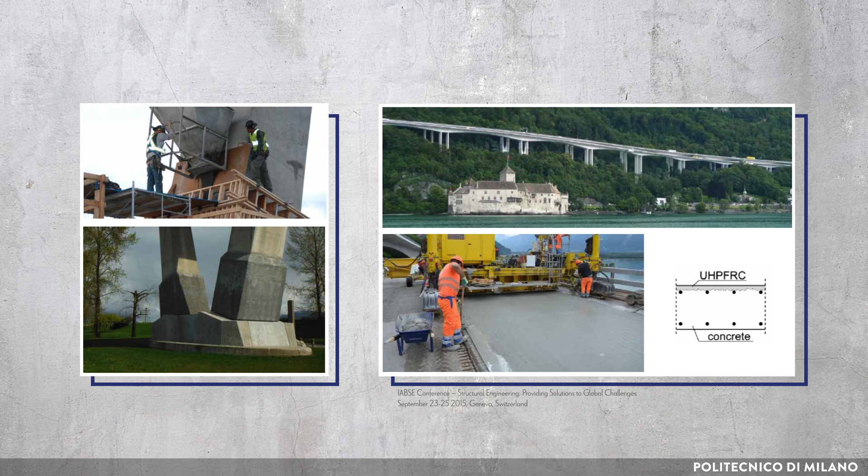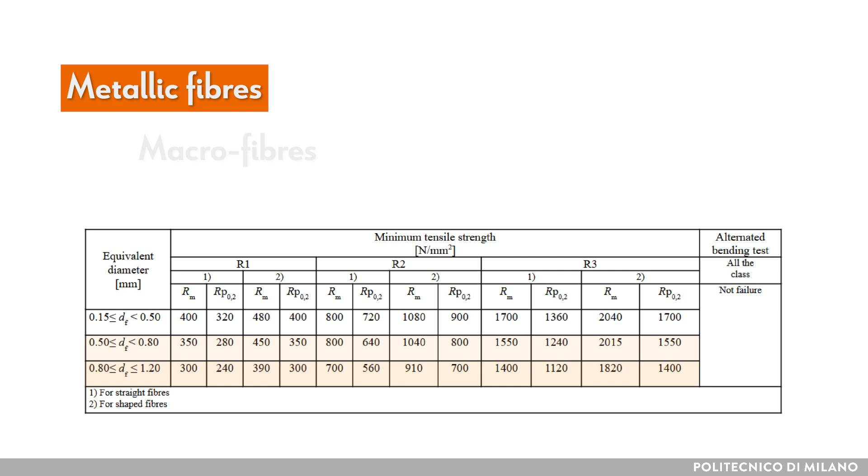In the market, many types of fiber are available. It is possible to split the fiber world in two large categories, the metallic and the synthetic fibers. The former are the most used until now to guarantee high performance of fiber-reinforced concrete and can be split into three classes according to the equivalent diameter of their cross-section. Macrofibers, with a diameter in the range of 0.8 to 1.2 mm, mesofibers in the range of 0.5–0.8 mm, and microfibers in the range of 0.15–0.5 mm. It is worth to note that synthetic fibers can reach a minimum diameter in the order of 10 microns.

The strengths characterizing the three steel classes are aligned to the values of conventional rebars, Dywidag bars, and steel used for pre- or post-tensioning. Looking to the most used steel fibers, the structural effectiveness is guaranteed only if fibers are well dispersed in the volume. If fibers are concentrated, no local toughness is achieved.

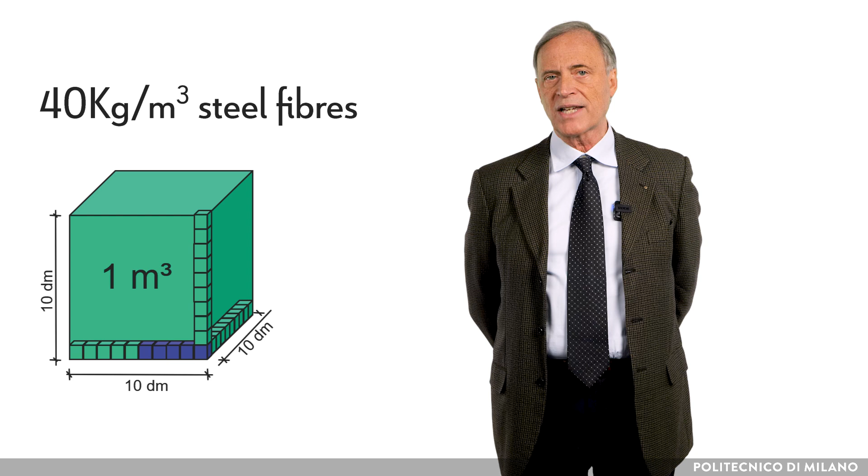Obviously, for example, an amount of 40 kilograms of fiber in a cubic meter of concrete corresponds to a growing number of fibers depending on fiber sizes. We can count around 160,000 fibers up to a total number of around 20 millions, passing from macrofibers 60 mm long with a diameter of 0.8 mm to microfibers 13 mm long with a diameter of only 0.16 mm.

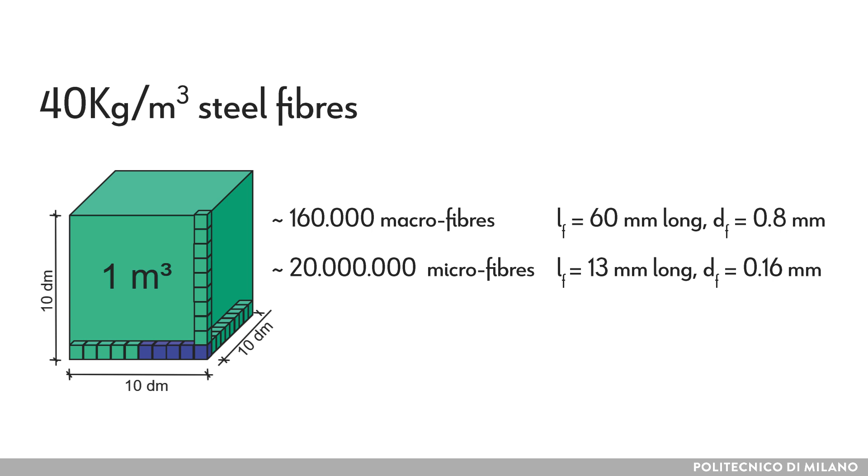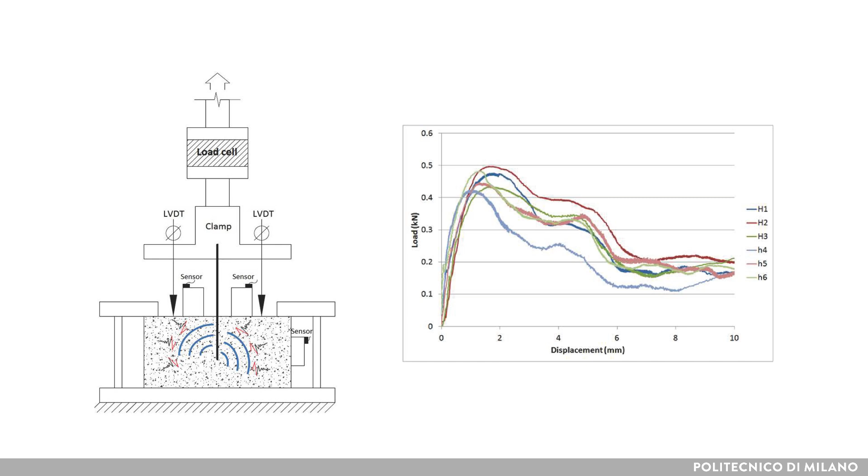The residual strength after cracking is due to the bond between the fiber and the matrix in the pull-out action. Even if we adopt a straight fiber embedded in the same concrete mix, the residual strength shows a certain scatter due to the distribution of aggregates around the fiber. The high standard deviation in the response is one of the peculiarities that has made difficult the evaluation of the fiber residual strength in the post-cracking.

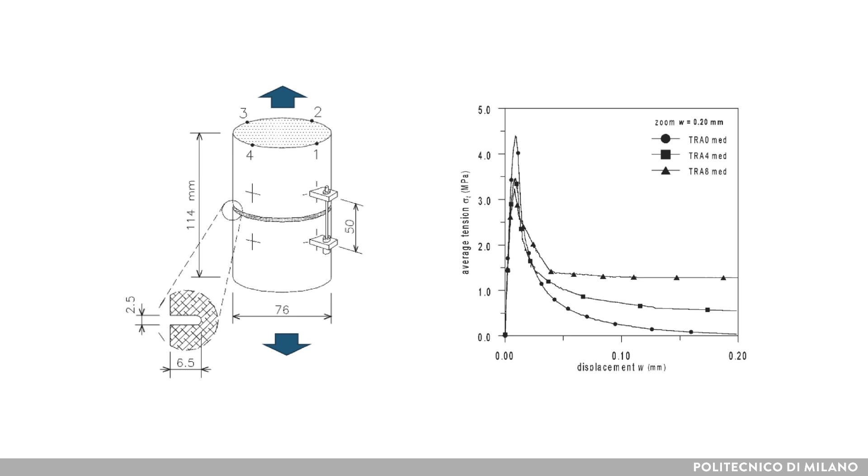In a uniaxial tension test carried out on a notched cylindrical specimen, fiber pull-out contribution corresponds to the curve after the crack opening. Only the accumulation of fiber pull-out resistant mechanisms can give a significant contribution to the overall response after cracking. Fiber-reinforced concrete performance in bending is measured by means of a 550 × 150 × 150 mm notched prismatic specimen to reproduce a three-point bending test.

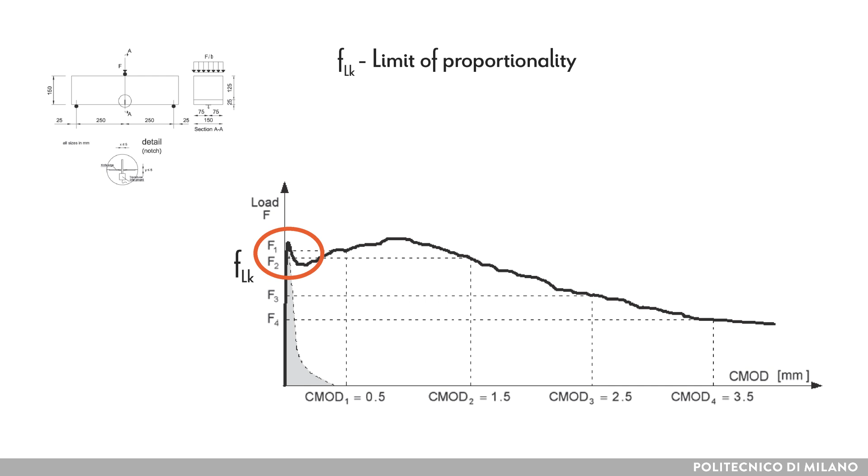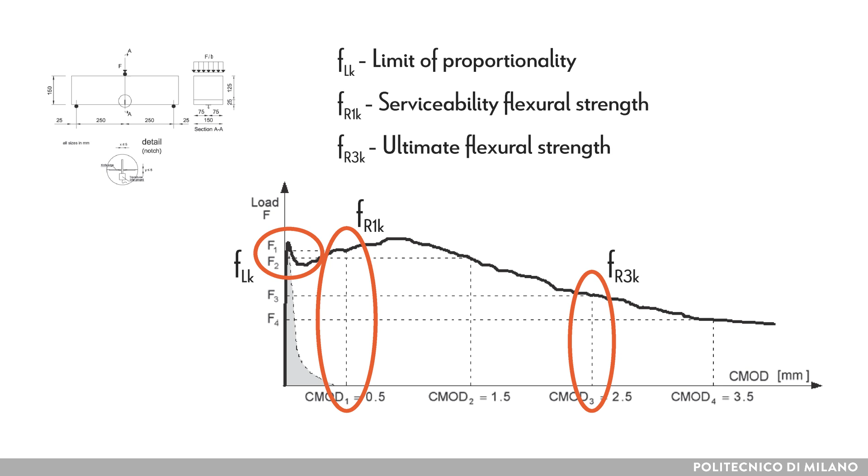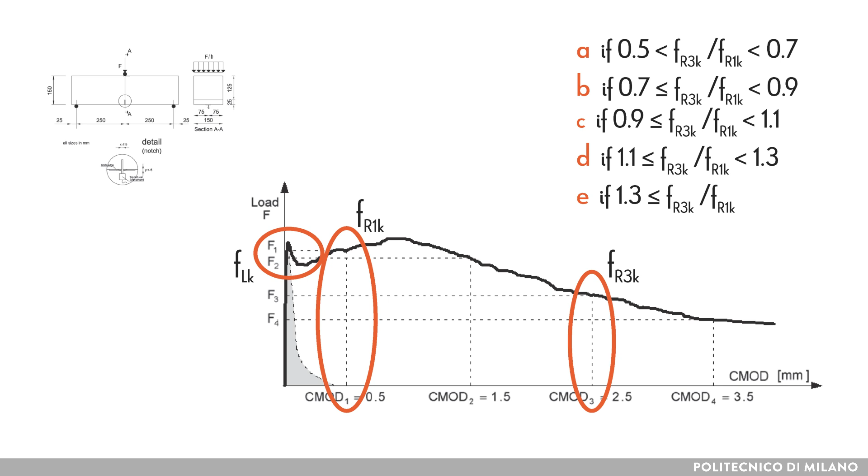Three parameters qualify the mechanical response of the material: the limit of proportionality fLk, the serviceability flexural strength fR1k associated to a crack opening of 0.5 mm, and the ultimate flexural strength fR3k associated to a crack opening of 2.5 mm. In particular, the fR1k value and a letter in the range a–e used to recognize the ultimate residual strength versus serviceability strength ratio classifies the mechanical behavior of the material.

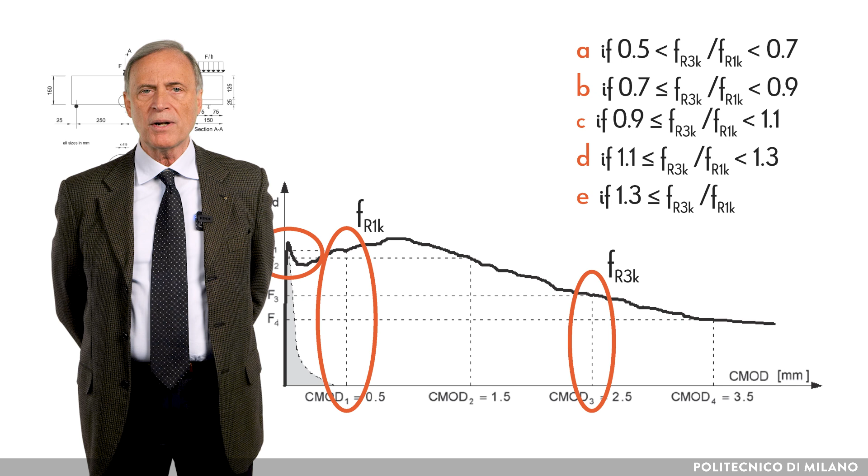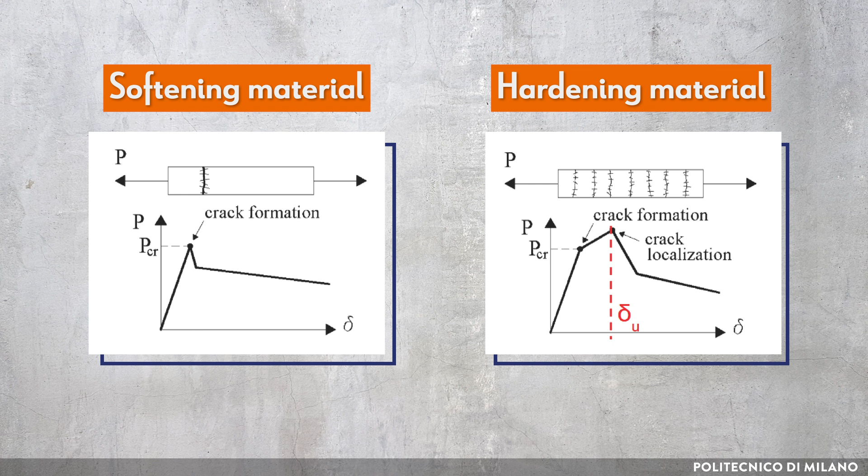Starting from the classification, it is possible to identify, by means of equilibrium equations, the pull-out resistance offered by fibers in uniaxial tension and the constitutive law in uniaxial tension. According to the amount of fibers and to their effectiveness in the matrix, mainly depending on their aspect ratio, corresponding to the ratio between the fiber length and its equivalent diameter, their geometry, and the bond strength of the matrix, it is possible to obtain two main behaviors in uniaxial tension: a softening behavior characterized by only one crack formed in the weakest cross-section, or a hardening behavior where a second branch with a progressive microcrack propagation takes place until a crack localizes and the following softening behavior takes place.

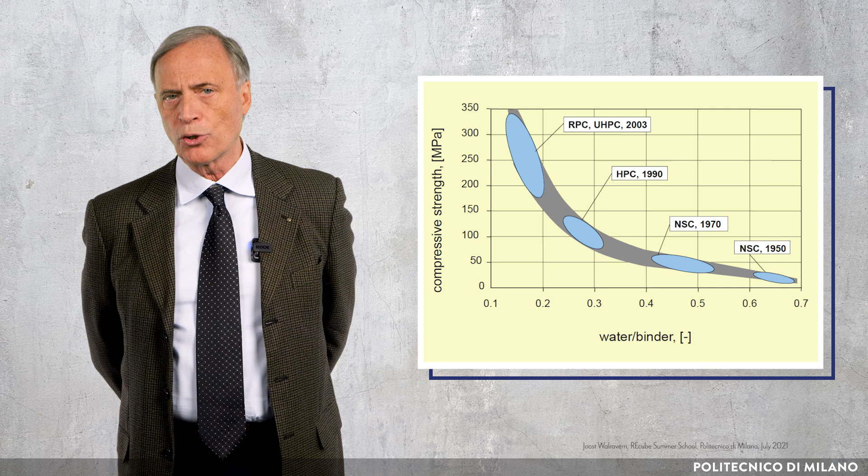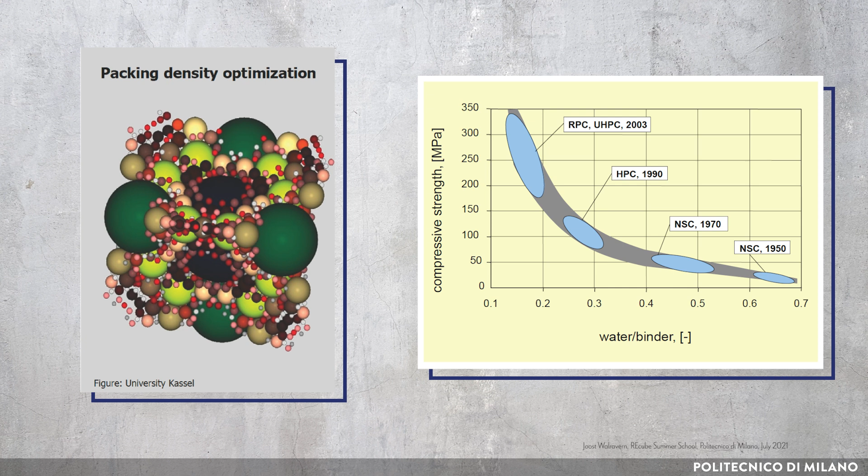The hardening materials today available in the market represent the most significant product obtained by the advanced products made available by chemistry in the 90s. Only concrete in the last decades has been able to improve so much its compressive strength, reaching strengths comparable with steel at a much lower cost. This research conquest is due to the possibility to compact the constituents of the conglomerate by adding to the traditional elements, aggregate, cement and water, also superplasticizers and other very fine constituents like silica fume, blast furnace slag, quartz powder and fibers, thus reducing the water-cement ratio.

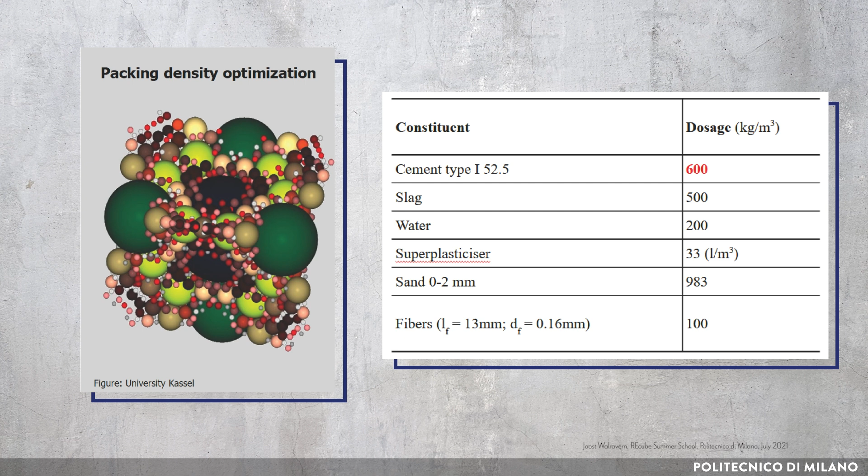Analyzing a common mix design of this product, it is possible to observe that the percentage of cement is very high with respect to a traditional concrete. We know that 1 kilogram of cement corresponds to around 1 kilogram of CO2 emission in the atmosphere. This means that to obtain a sustainable material, a reduction to 1/3 of the volume needed for a conventional concrete element must be obtained in the structural design when this type of material is adopted.

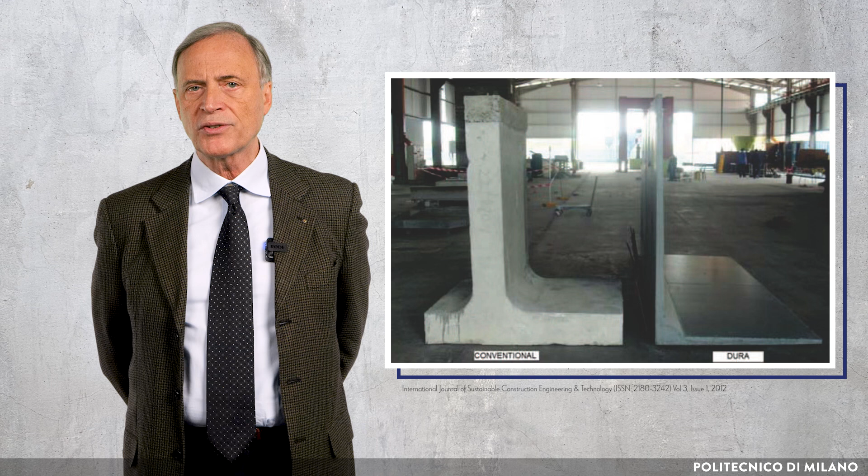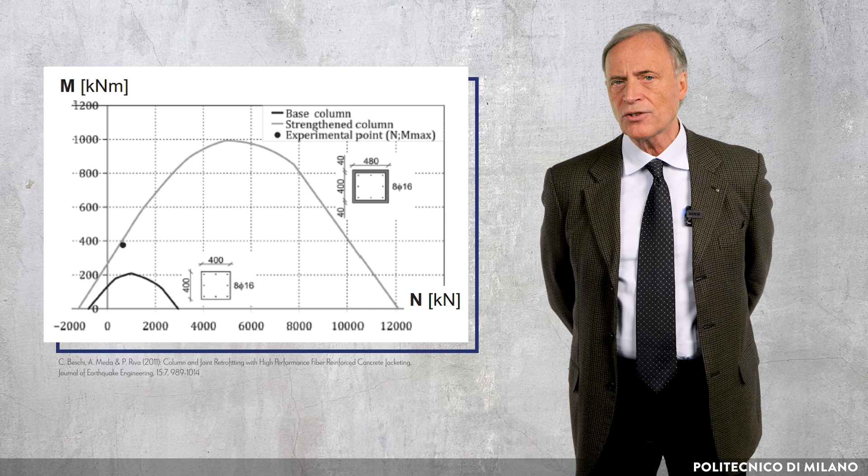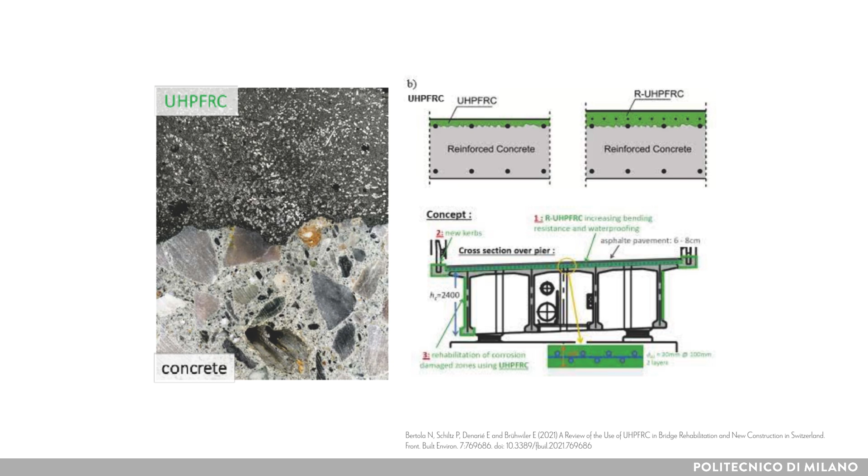Let me show now a few examples of application. HPFRC can be used to repair top slabs of a bridge deck by using the high bond between the concrete support and the fine matrix of HPFRC and its very low porosity. The HPFRC can be also conventionally reinforced in case of significant thickness. Always in bridge structural retrofitting, HPFRC can be useful in the joints because its higher bond strength can reduce the sizes of the joints.

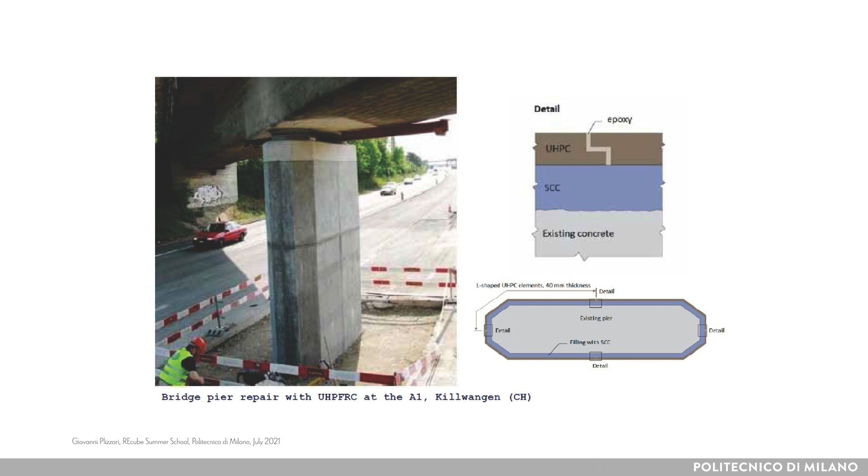In the bridge structure, the jacketing technique can be very effective also to strengthen piers, guaranteeing a high durability in time. Special solutions to improve shear capacity have been already proposed in Germany, allowing a fast and economic solution that could be temporary or definitive according to a specific design. At Politecnico di Milano, my research team is investigating other solutions to strengthen half joints. The idea is to couple an HPFRC reinforced top slab to the original dapped end to detect the damage in the half joint and, at the same time, to increase its bearing capacity.